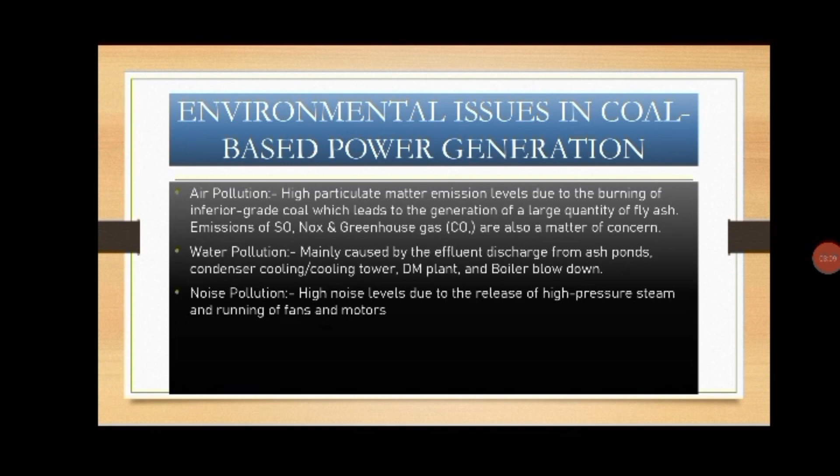Second is water pollution, mainly caused by effluent discharge from ash ponds, condenser cooling towers, DM plant, and boiler blowdown. Third is noise pollution - high noise levels due to the release of high pressure steam and the running of fans and motors. And last but not the least, land degradation.

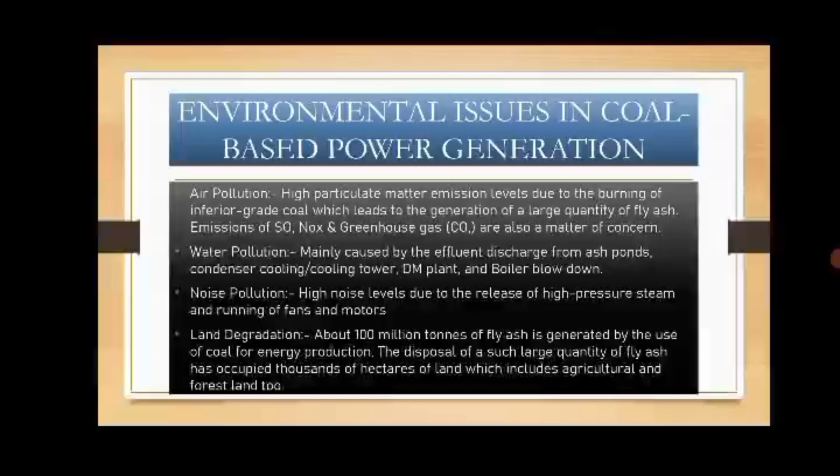About 100 million tons of fly ash is generated by the use of coal for energy production. The disposal of such a large quantity of fly ash has occupied thousands of hectares of land, which includes agricultural and forest land too.

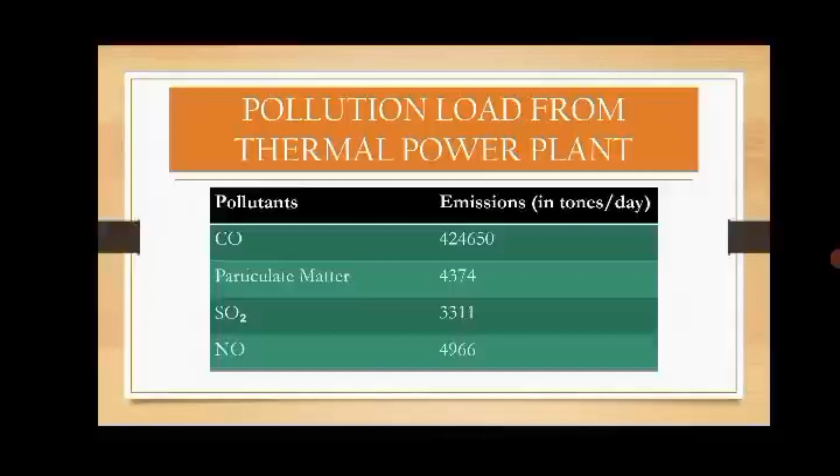Now let's see the pollution load from thermal power plants. Here is the amount of pollutants and emissions in tons per day, for CO, particulate matter, SO2, and NO.

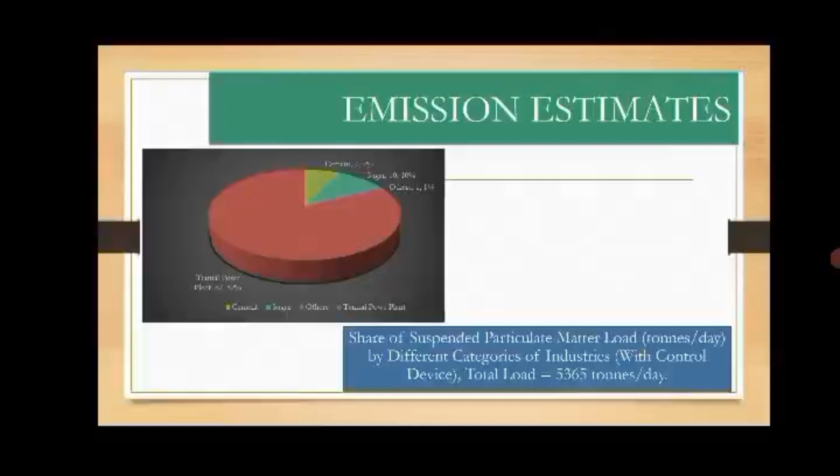This is a graph showing emission estimates for the share of suspended particulate matter load in tons per day by different categories of industries with control devices installed. Total load being 5365 tons per day. As you can see here, thermal power plants have the lead in the emission estimates.

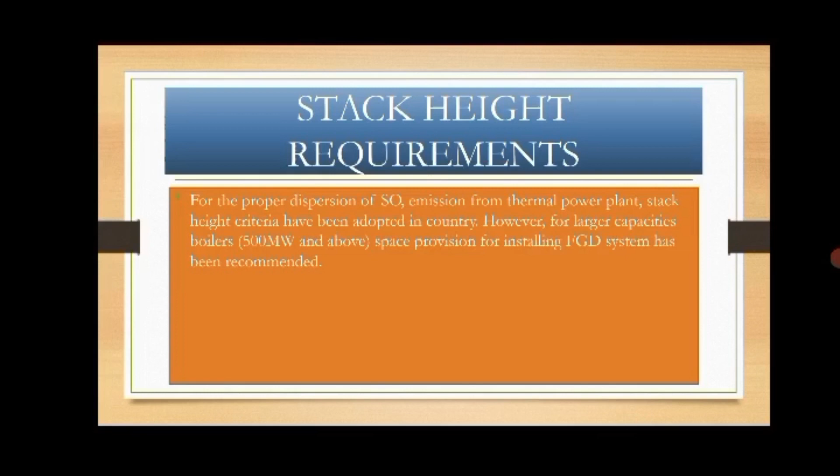Now let's see the stack height requirements. For the proper dispersion of SO2 emissions from thermal power plants, stack height criteria have been adopted in the country. However, for larger capacity boilers, 500 megawatts and above, space provision for installing flue gas desulfurization method has been recommended.

Now let's see some of the hazards produced due to coal-based generation of electricity. A fundamental issue regarding centralized generation and the current electrical generation methods in use today is the significant negative environmental effects that many of the generation processes have.

Processes such as coal and gas not only release carbon dioxide as they combust, but their extraction from the ground also impacts the environment. Open pit coal mines use large areas of land to extract coal and limit the potential for productive land use after the excavation.

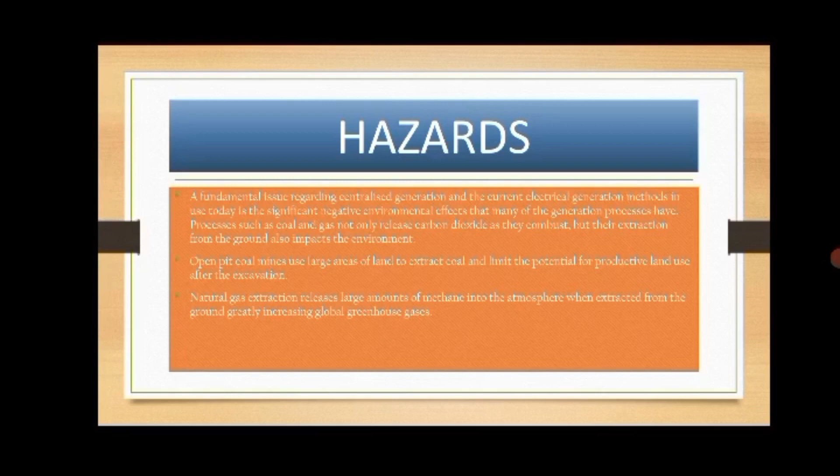Natural gas extraction releases large amounts of methane into the atmosphere when extracted from the ground, greatly increasing global greenhouse gases. Per unit of electricity generated, coal and gas fired life cycle greenhouse gas emissions are almost always at least 10 times that of the other generation methods.

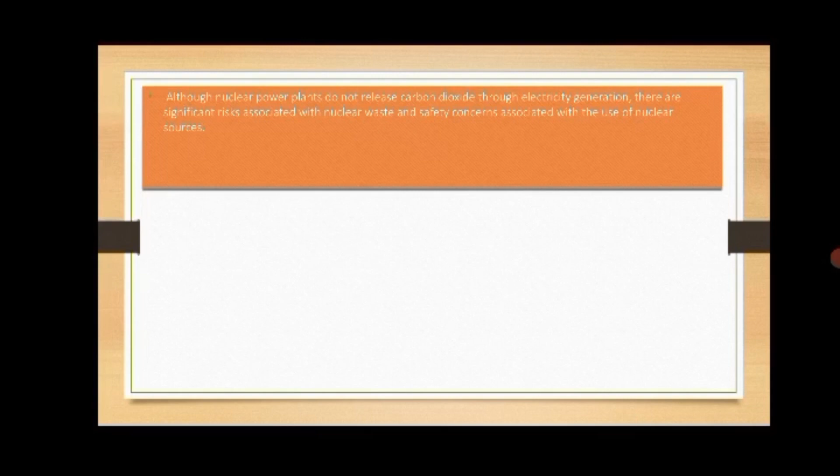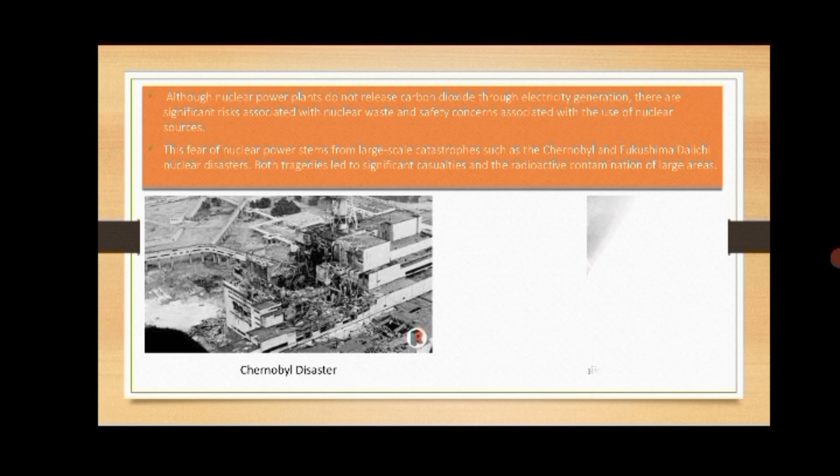Although nuclear power plants do not release carbon dioxide through electricity generation, there are significant risks associated with nuclear waste and safety concerns associated with the use of nuclear sources. Let's not forget the fear of nuclear power stems from large-scale catastrophes such as Chernobyl and Fukushima Daiichi nuclear disasters. Both tragedies led to significant casualties and the radioactive contamination of large areas.

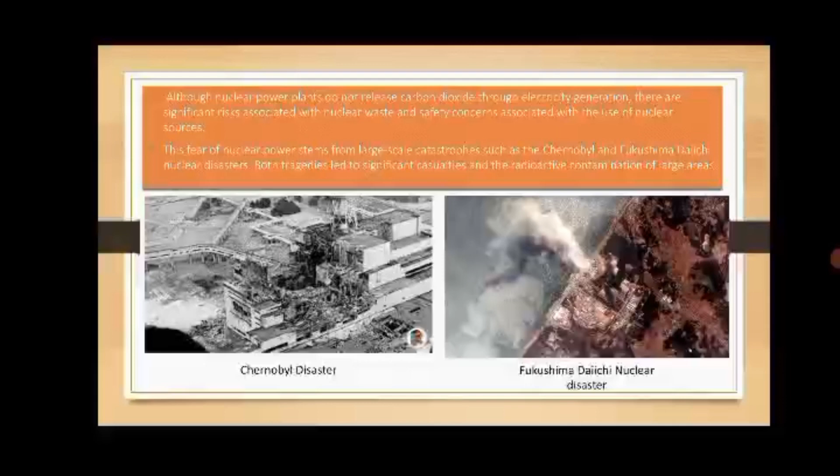We have talked enough of the hazards produced by coal-based power generation. Let's talk about the solutions, some of which are solar power and hydropower.

Solar energy is a great renewable resource for producing electricity from the sunlight falling on the receiver panels. We nowadays see solar panels installed on every terrace of every house to produce electricity in a more environmentally friendly way. The next step is hydropower.

Hydropower energy is used as a renewable resource by using the potential energy of running water. Falling water on turbines produces electricity with the help of a generator.

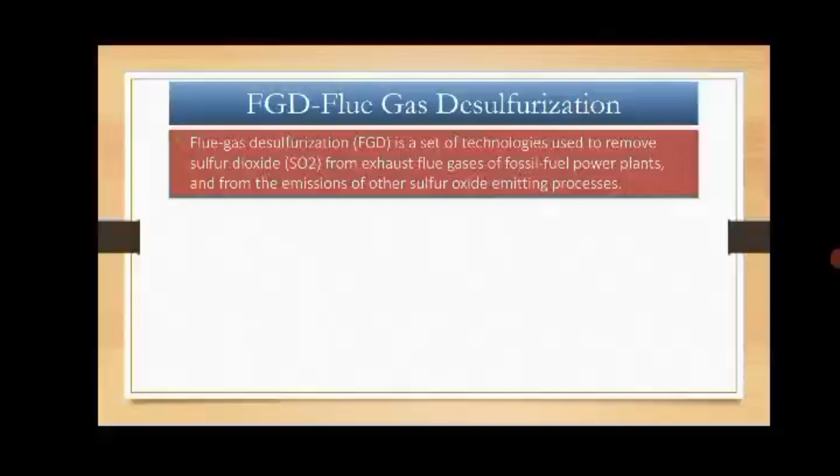Next up is flue gas desulfurization, or FGD, a set of technologies used to remove sulfur dioxide (SO2) from exhaust flue gases of fossil fuel power plants and from the emissions of other sulfur oxide emitting processes. Since stringent environmental regulations limiting SO2 emissions have been enacted in many countries, SO2 is being removed from flue gases by a variety of methods, common ones being wet scrubbing, spray dry, wet sulfuric acid process, and S-NOx flue gas desulfurization.

The next up is the electrostatic precipitator. An electrostatic precipitator is defined as a filtration device that is used to remove fine particles like smoke and fine dust from the flowing gas. It is a commonly used device for air pollution control, used in industries like steel plants and thermal energy plants.

In 1907, chemistry professor Frederick Gardner Cottrell patented the first electrostatic precipitator, used to collect sulfuric acid mist and lead oxide fumes emitted from various acid making and smelting activities.

The next up is Clean Coal Technologies, or CCTs. Clean coal technologies are a new generation of advanced coal utilization processes that are designed to enhance both the efficiency and the environmental acceptability of coal extraction, preparation, and use.

This is the need for adoption of CCTs. To meet the increasing demand for power with minimal environmental impact for sustainable development, the adoption of clean coal technologies with enhanced power plant efficiency, fuel switching, use of washed coal, efficient pollution control systems, and proper byproduct and waste handling and utilization is necessary.

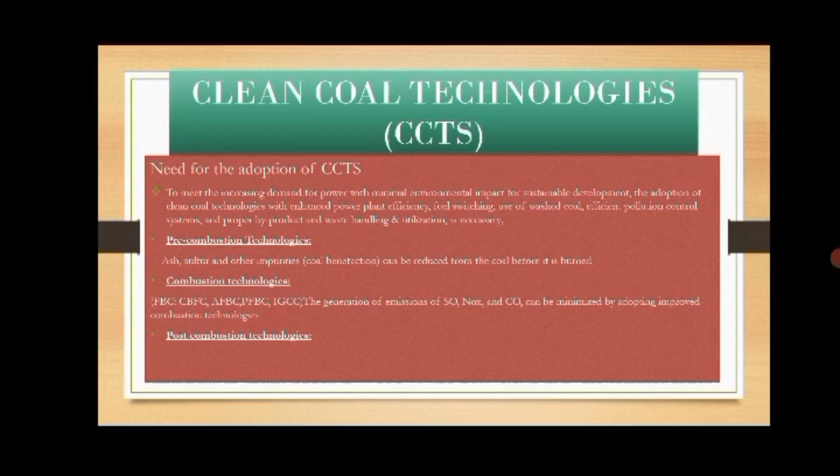Pre-combustion technologies: ash, sulfur, and other impurities can be reduced from the coal before it is burned. Combustion technologies: the generation of emissions of SO, NOx, and CO2 can be minimized by adopting improved combustion technologies. Last, post-combustion technologies: end of pipe treatment, installation of pollution control equipment such as ESP, DENOx, and DESOx systems.

This has been the solutions for the electric power generation problems that are undertaken in the electricity generation.